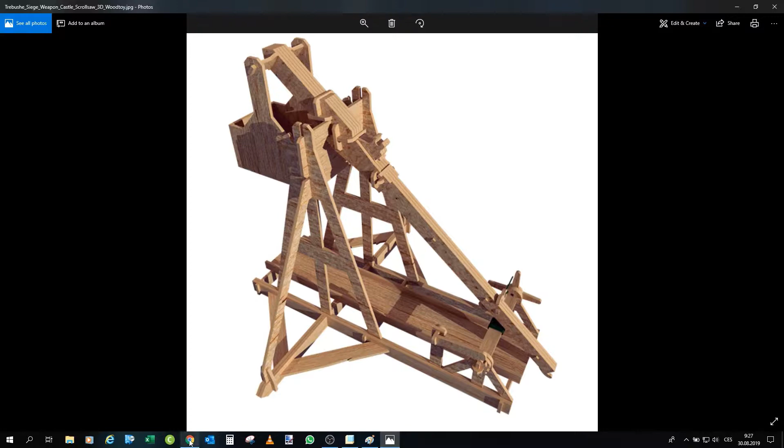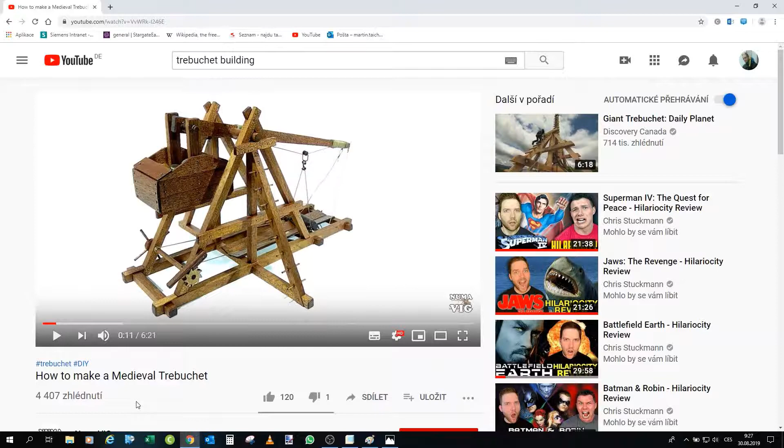Now, when it comes to the process of designing the model, I didn't really use reference pictures like in other projects, but I used a reference video, particularly this one: how to make a medieval trebuchet from Numa VIG. The link will be in the description, and the video is really great. I really like how he showed how to make it, and I kind of stuck to this design, though I changed it a little bit, made a few changes here and there. What I really used from this video is this diagram with dimensions that I tried to copy and use in my own design, because there is a strong relationship between this overall dimension, 354, and the distance of the counterweight. So that's basically what I needed and what I took as my starting point.

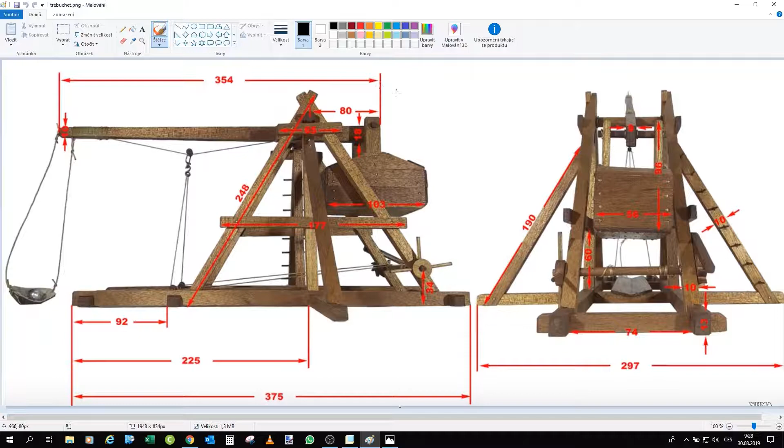So now we can go to Creo and take a look at the final design.

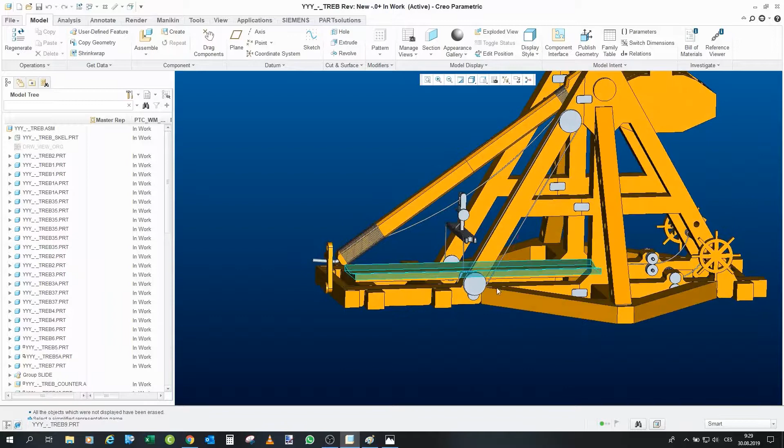So we are here in Creo, and this is the trebuchet model I have so far. Now as you can see, it looks a little bit like the design from the video, though I hope you can see that there are some changes. So I will try now to explain what I did and how I did it.

As you can see, the model itself consists of several pieces that are put together with this approach: one has a hole, the other has holes, and those two snap together. Now, because the material is PLA, I try to make basically no allowance between those two parts that would be connected, and snap them forcefully so that they are tightly locked. That way I hope I will avoid using any glue - well, not any glue, because there has to be some, but it would minimize the amount of glue that is actually needed.

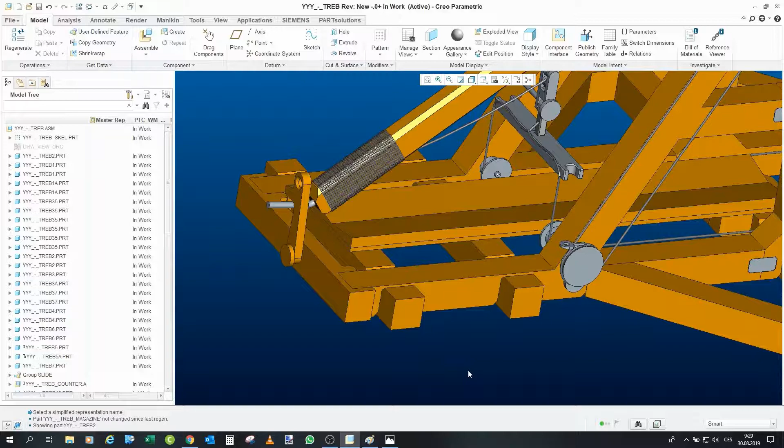Now, as you can see, for example here in this part, I have it divided into two. Here I basically have no other way around but to use glue. Why was I forced to do that? It's simple: with my initial design, I didn't really consider the printing bed of the printer, and the maximum dimensions it could print is basically 20 by 20 centimeters. Thus, I had to take a look at those designs I have that are larger, longer, or wider - I simply had to divide them.

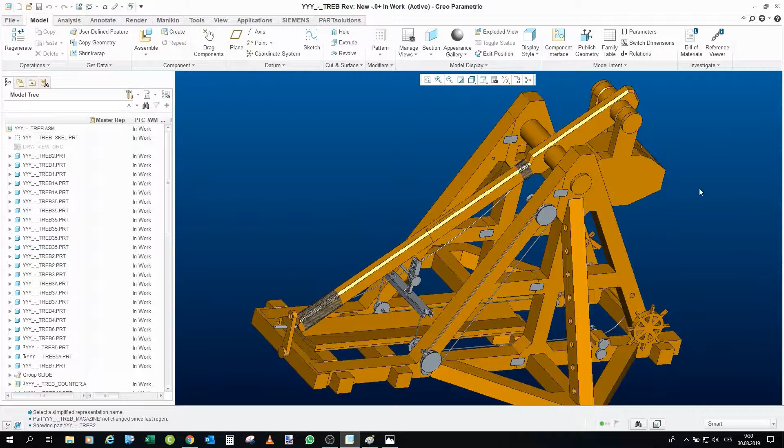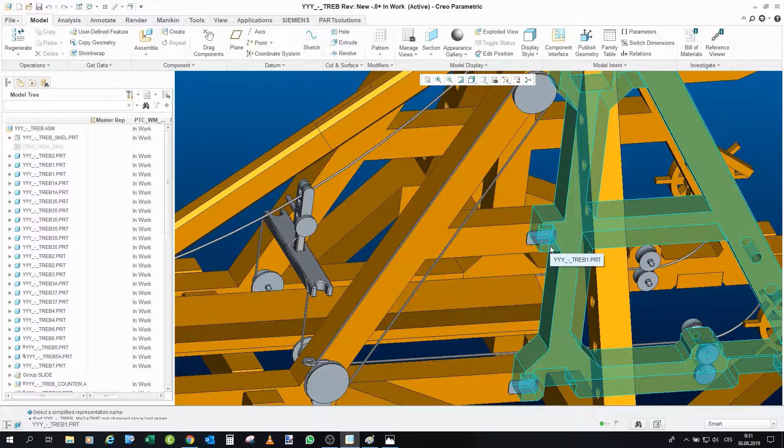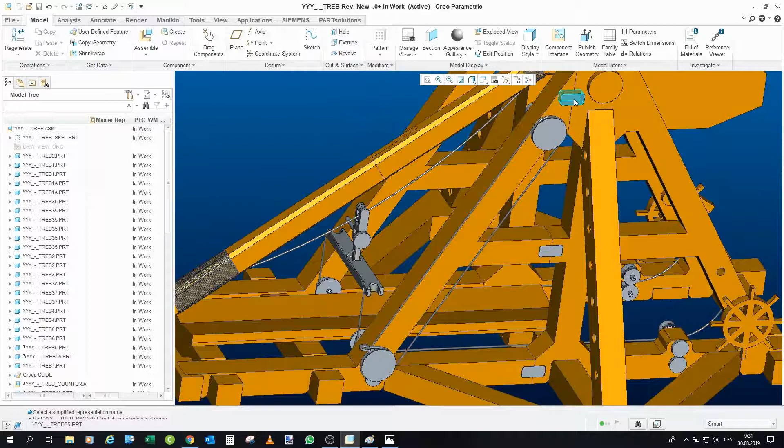The same goes for those two side pieces. As you can see, they were one piece, now they are two. What I did here is prepare those little slots, and into them I inserted these locks, I guess we could call it. Now, after the design is complete, I can say this wasn't the best design, because I could have made some locks straight from one half to another, but well, live and learn, I guess. So now the idea is that I will put those two halves together, insert those locks, and that would centralize it, and I could apply some glue and glue everything together.

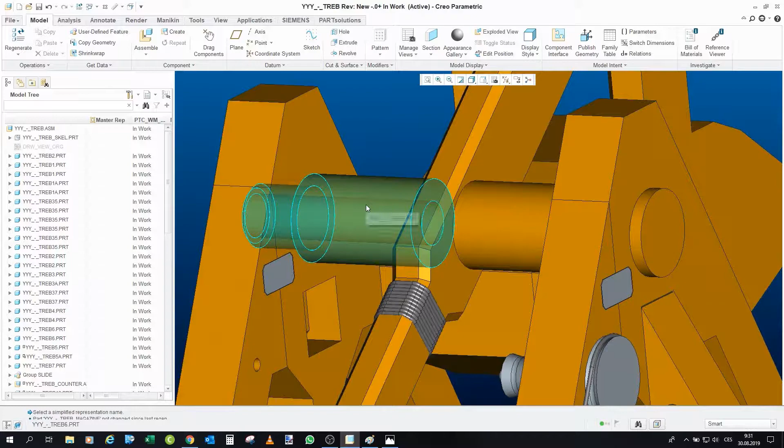When it comes to the shaft, it's designed in such a way that I have a big hole. Into it I put an insert, and inside that insert we have this long shaft, and on the other side we have a washer. The idea is that there is no allowance between the washer and the shaft, so they are tightly locked.

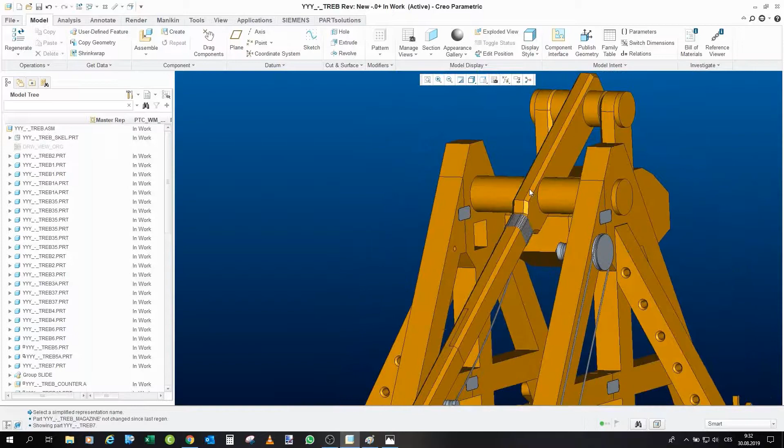That could hold this entire piece together. The same goes here for the counterweight, it's basically the exact same design. Those two washers are the same.

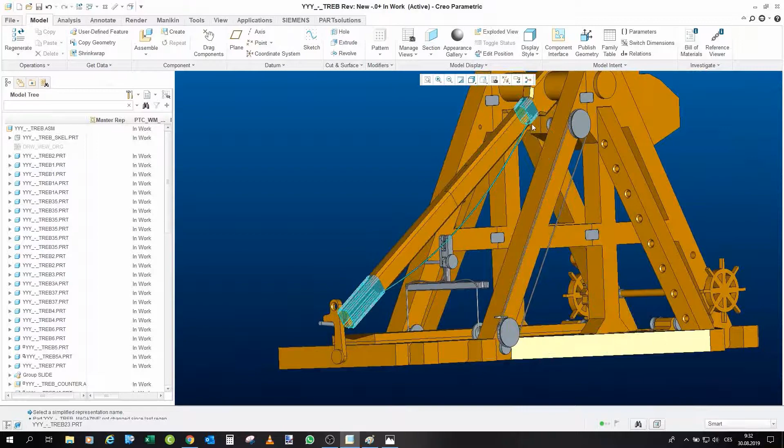Now, as you can see, here is some model of the rope, or the string I guess. Here we have a string that goes through the entire arm, and here we have an assembly, basically a mechanism that could be pulled.

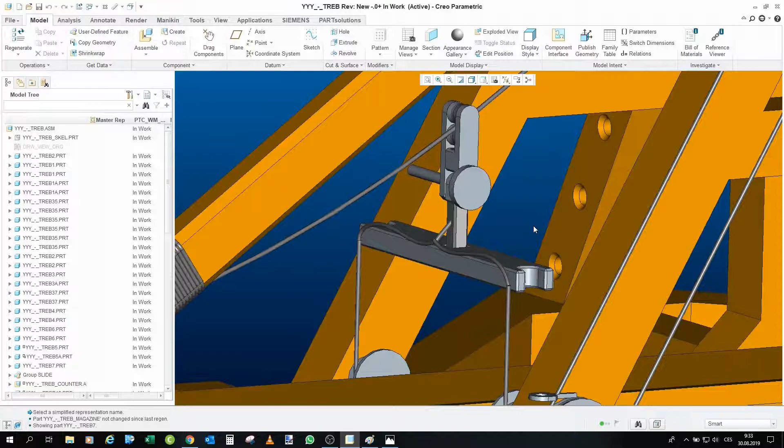Now, you can see that I didn't really bother with the proper shape of the string. That's because I had a different design originally, and then I changed it, and added this part so that the rope, or the string, is held basically parallel to the side walls.

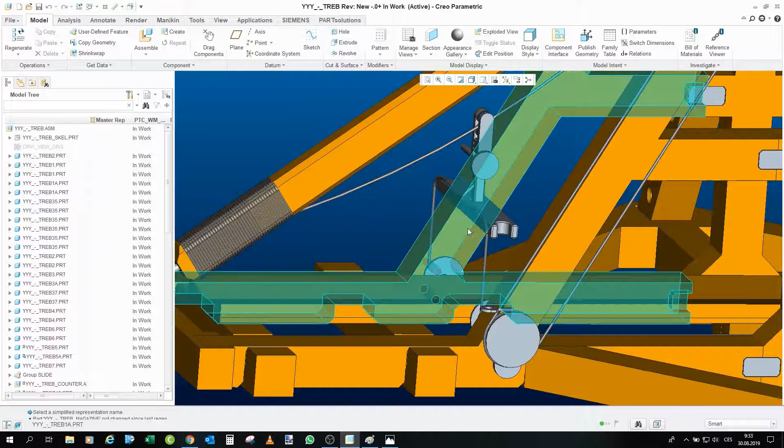I admit I was a little bit lazy to actually change the shape of the rope, but I don't really think it's that necessary, because after all, rope is something I wouldn't 3D print, right? Anyway, the idea is simple.

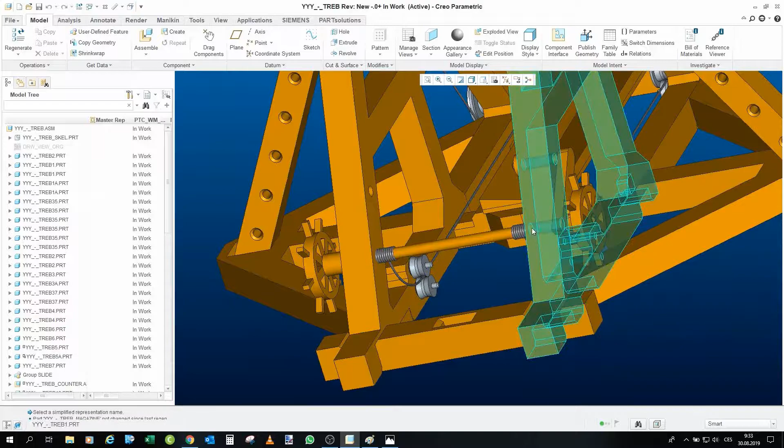Here we have a shaft with the string attached to it, and here we have a pair of pulleys on the other side, and they will lead the string here to the other pair, and from that it will go straight to the shaft.

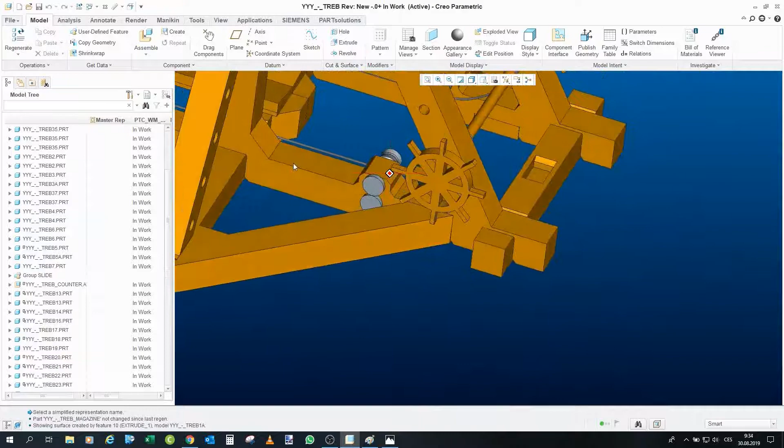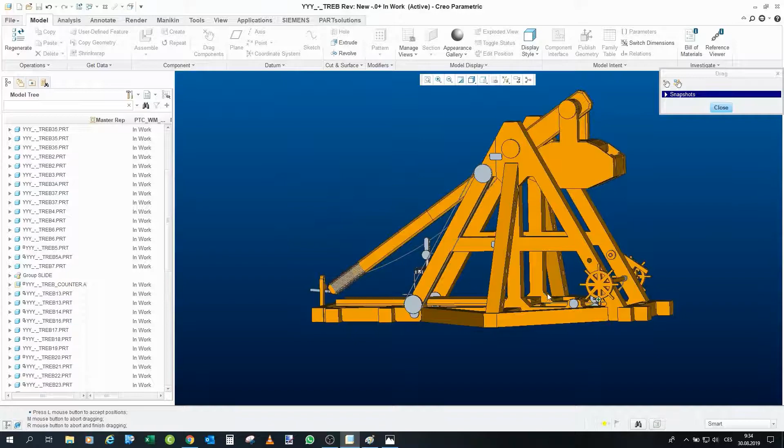When you actually rotate it, it will pull everything up. I obviously didn't animate the movement of the rope, because why would I?

Here we have this assembly. It basically has this pin that ties everything together. It has those two wheels, and it drives on the string on it.

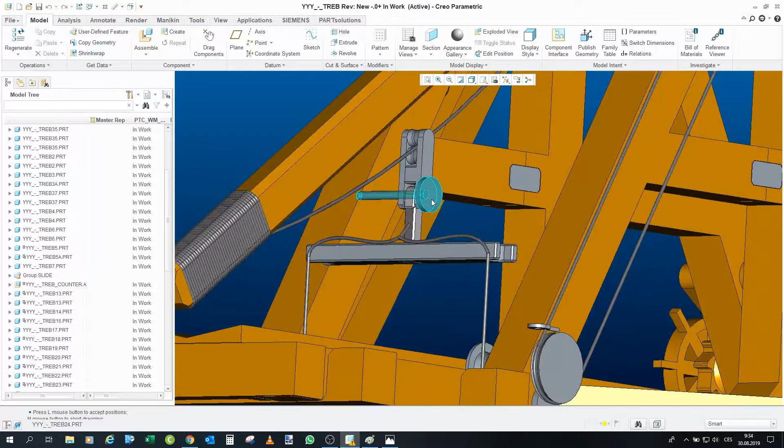When I put the pin out, the entire assembly disconnects and I can fire. Then I will attach it once again and I can pull it down.

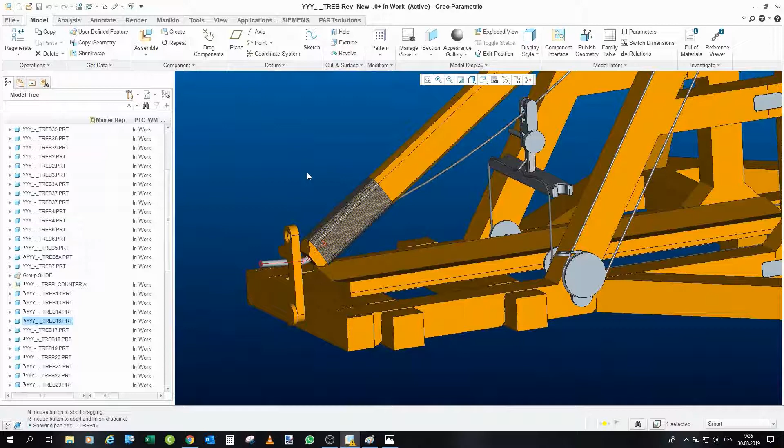Here we have a firing mechanism. It simply locks this part in place. Then I will pull it down like that, and the entire thing fires.

Now here we have a slider. Here the sling will rest with the projectile, and then shoot.

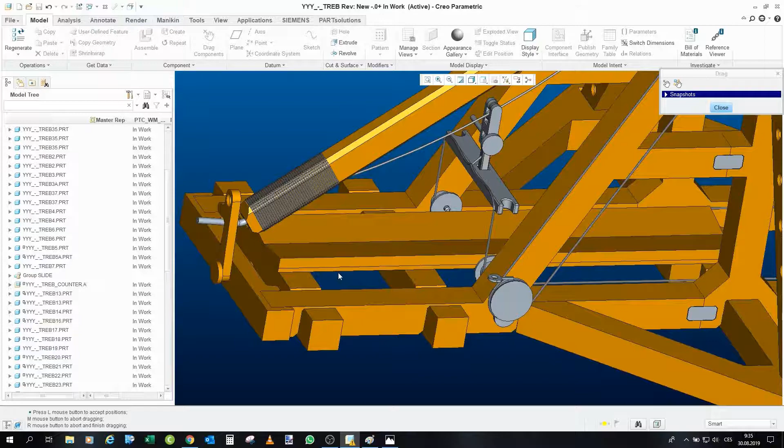The slider is also made using glue, because, as I said, I really like to avoid having support material, and here I had no choice because I have those three pins. Thus I had to divide this part into two - one would be printed with those pins, one with this slider, and then I will glue it together.

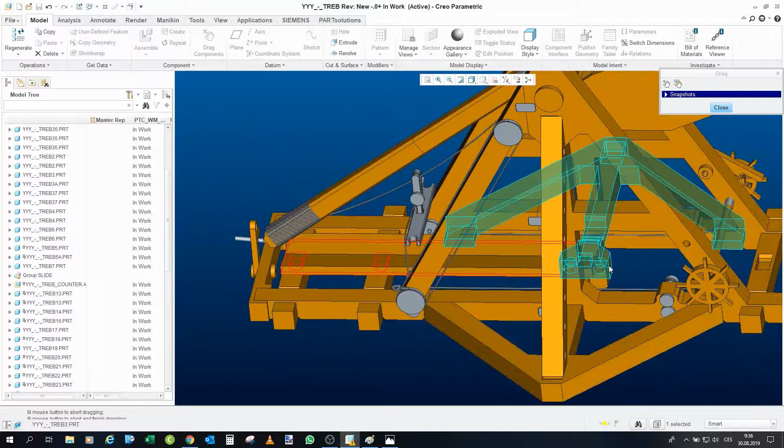The idea is to then snap it into those three openings. Thus, it would also straighten it and hold it together.

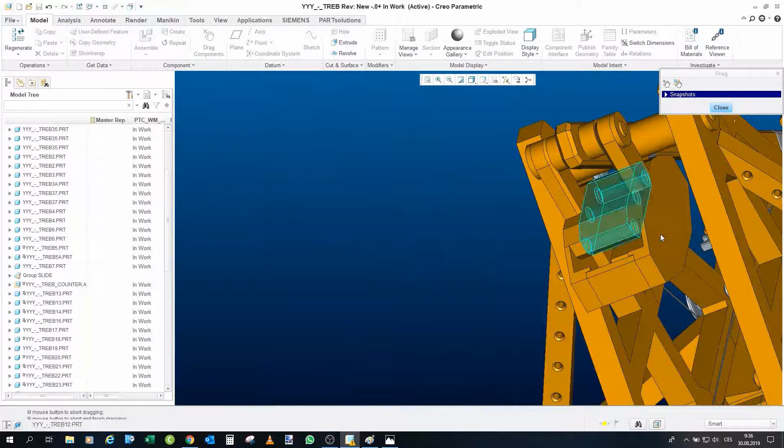Now the counterweight assembly is basically like Lego. I have two sides with various pins here and there, and those parts with the holes, so it will all snap together just like Lego.

So that would be probably all when it comes to the design itself. In the next video we will actually take a look at the printed material assembled together. We will basically take a look at the model itself.